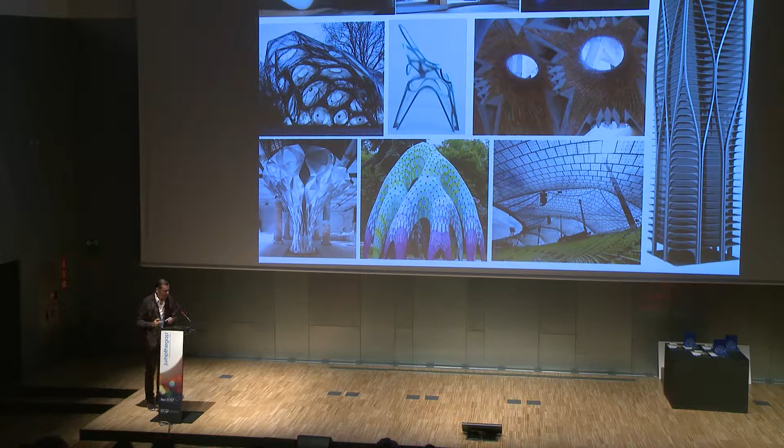So I will spend a few minutes on this. So this is what this new world looks like, and you can see it's very rich, very diverse in terms of textures, morphologies, even colors, materials, detail reticulations, etc. And it has some precursors you can see in the images. Sagrada Familia is one of them, the great Gaudí, who was not inventing form but finding form according to the logics of structure and physics, and Frei Otto as well. And the rest is all contemporary figures. We are within that, but there's quite a few others. I want to name, for instance, Achim Menges and Marc Fornes, among many others.

And so this is how I want to define Tectonism, that it is a stylistic heightening of engineering and fabrication-based form finding and optimization processes. Stylistic heightening because, after all, as designers, we are very much interested in the expression, and design is always also communication, so it is not only an aspect for us of technical optimization, but the morphologies which are coming out of this are very rich and become a beautiful repertoire of articulation.

So, in terms of my theory of styles, I'm distinguishing epochal styles, and the last big transition was from modernism to what I now call parametricism, which has to do with the introduction of computational technologies, but also the changes in society which are driven by the new convergence of computation and telecommunication, which has dynamized society, which required a new style, I would believe. But you can see that here modernism has a series of subsidiary styles. So 60, 70 years of modernism wasn't a monolithic development, but had a series of steps. And I think in parametricism, I started about 25 years ago, we have already seen a number of subsidiary styles, which I will explain.

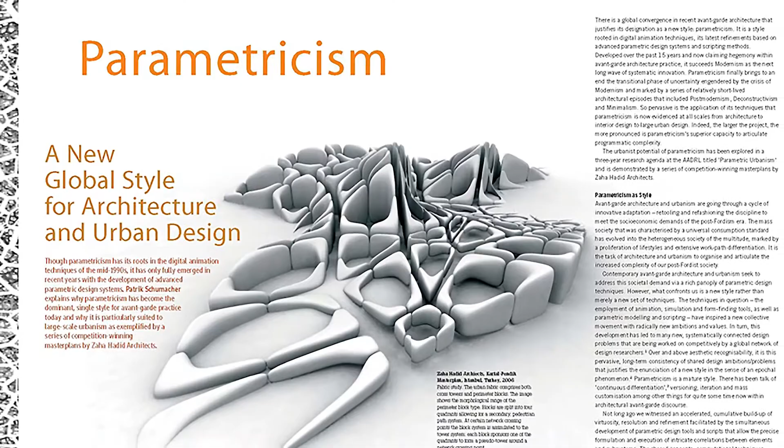So parametricism, I think, emerged in the mid to late 90s, and 10 years later, I was reflecting on the fact that we had a new stable paradigm for over 10 years, and I coined the phrase parametricism. And actually, parametricism also encompasses urban design and a new order of the city, as well as architecture, interiors, and product design. So this is just an overview. That's the work of Zaha Hadid Architects across the various scales, all the way from urbanism through architecture to products. And there's a kind of precursor. Zaha's first sketches from the 80s show already this interest in a new level of complexity and dynamism in her repertoire.

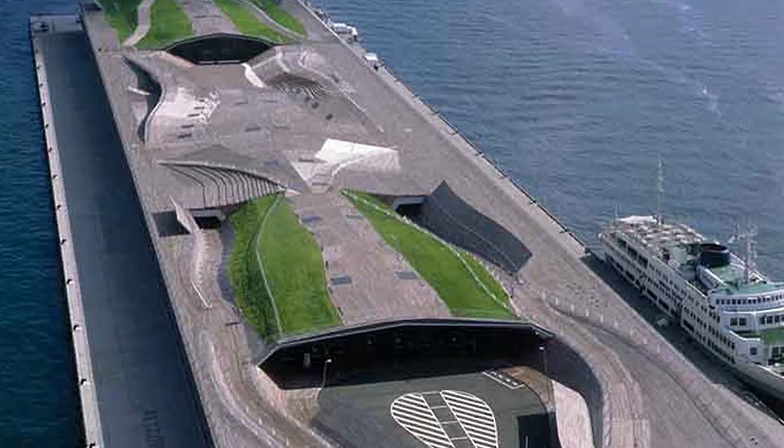And in terms of the first expression, as it were, of parametricism, I term it in retrospect foldism. It starts with the idea that one, instead of building up complexity by adding up pieces or layering pieces like in deconstructivism, one can take a single surface and differentiate this. And it is a very, very adaptive and fluid set of systems which pick up contextual features, internal requirements, and get something going which has both coherence and intensive differentiation. So just a few of those projects which worked with this kind of idea of a differentiated single surface.

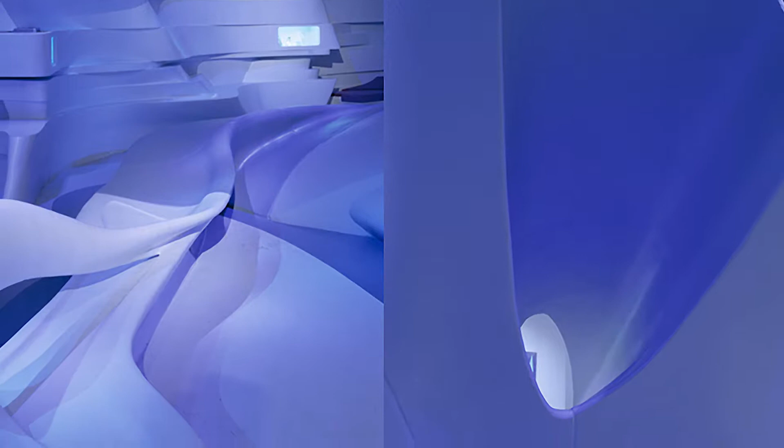It's not only Zaha Hadid Architects, there's FOA. It also moves from buildings to furnishings. Some of our works, student work, this was corporate interiors, urbanism again, and interiors. You can see here that the idea is that you have a continuous variation where situations morph and modulate from one into the other seamlessly. So it is standing against a clear separation of domains and against the cellularization of space into discrete and separate domains. And I'm just going to move you through some of those interiors.

Now, there's also a bathroom from us in part of a hotel room, actually in Madrid. This is a continuous Corian surface material, and a lot happens in the bathroom, so we used this for the whole room. And you can see here that the elements are not plugged onto each other, but one surface is modulated. This is a door where the handle is kind of evolving out of the door surface, or a table which I've designed. But we also find this kind of philosophy in car design. Instead of plugging on a kind of headlight, it's kind of modulated into the surface.

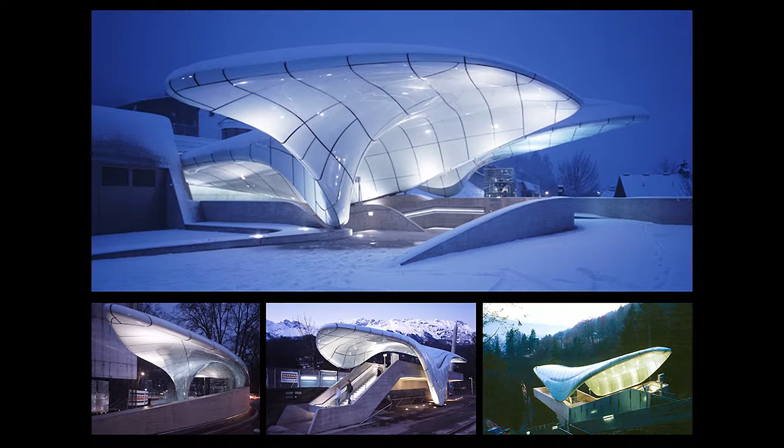And this also goes into product design and fashion design, jewelry design, if you like. So the idea of parametricism and this kind of surfaces is that there could be a system or genotype which can then adapt itself to different conditions and be varied across. And again, in an interior where all the different features and aspects are made out of one continuous surface.

I'll just click through that rather quickly, some of our works on various scales. And, you know, a staircase is just another rippling of a surface which becomes wall, ceiling, the lighting part of the same formalism. And if you do this, you declutter the space. You have a lot of richness, diversity, but the essential features of the space are easy to grasp because they're not cluttered up by adding lots of pieces together.

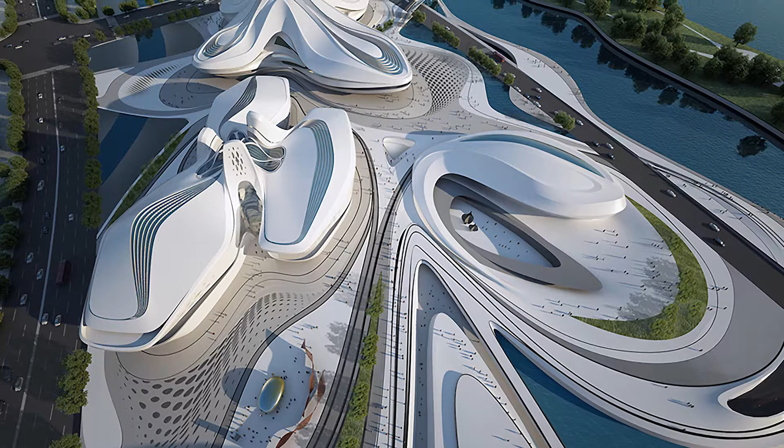And you can also switch atmosphere, and the same principles move from gypsum into timber. And again, the surface delivers the various features and aspects which need to be distinguished and delivered. More recent attempt, where three different institutions of a cultural complex, a museum, an opera house, and a multipurpose house. It's all about embedding this into a landscape and becoming, again, a continuous surface condition.

This is just about to finish on site right now. So as you can see, foldism continues, even though we are in a different stage. These projects take many years to evolve. So what is happening now and finishing on site is not necessarily the latest in our design thinking.

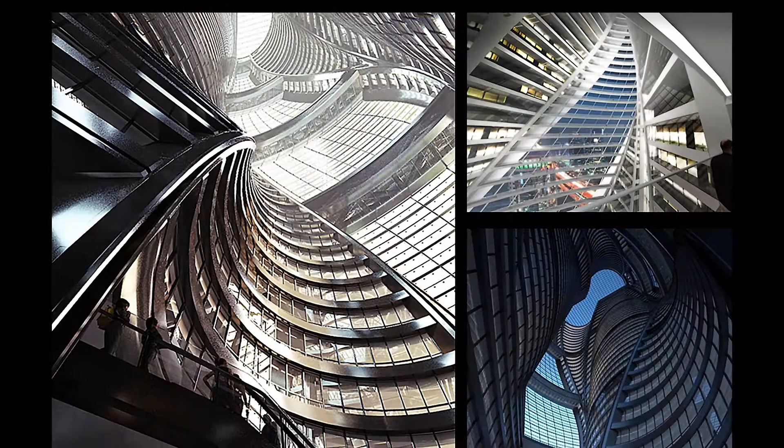Again, this also goes for interior spaces. The continuity of space, we're also applying this to towers now. Instead of separating floor by floor and then cellularizing everything, it's all about a continuous experience you can navigate. So I'm very interested in towers which are opened up through interior atriums.

So the next stage, very similar in a way, is this idea of blobism, on blobs, volumes which fuse, and again, it's nearly another version of that first stage, where you move smoothly from one zone to another, and they're kind of partially articulated. And again, there's a whole world of elements which comes out of that.

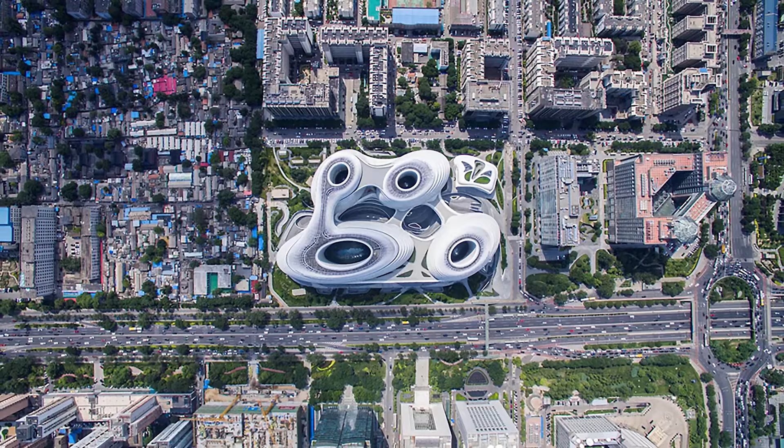And you see, it's quite striking set against all prior architecture. It sticks out, but it also delivers a new level of complexity, three-dimensionality. I describe it as maintaining legibility in the face of complexity. The fused three-dimensionality of this is remarkable.

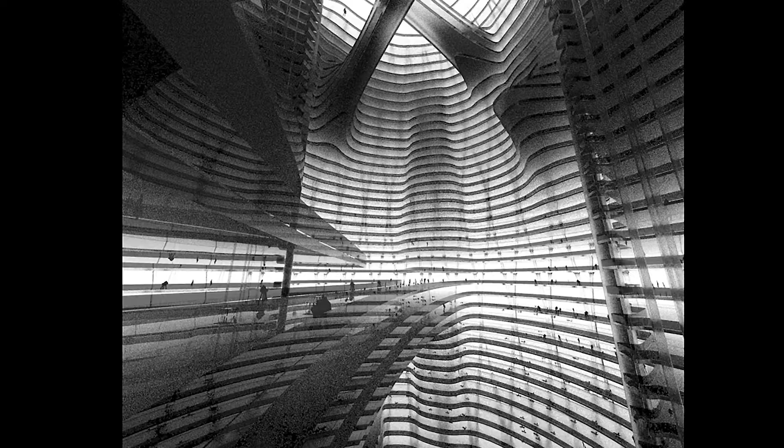So, and again, this is my new passion for mega atriums. So the interior, a continuously differentiated interior world where everything is inter-aware, intervisible, and variation instead of separation is the game. And this is a project which actually we're working on now, trying to bring on site.

Swarmism is something very similar also, but it applies to urbanism and the idea of having discrete elements, but so many that they're no longer parts, but particles which associate in different ways and can differentiate an urban scene. So you don't need to have literally contiguity, you can have swarms of elements which deliver variation and differentiation. And again, I'm interested that this operates on an urban scale as well as on an interior and product scale even.

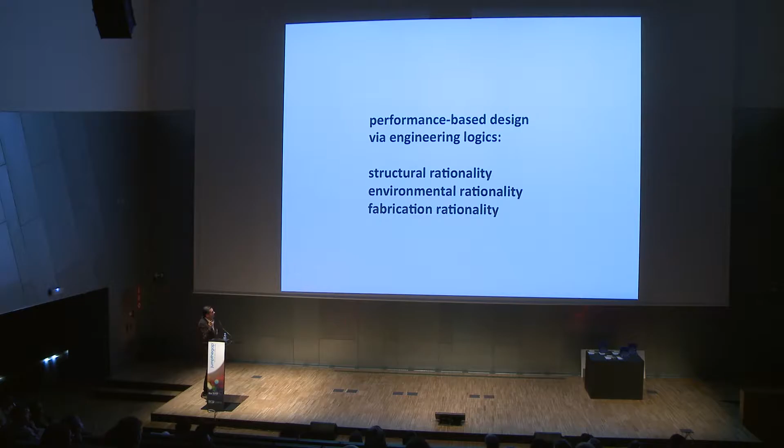So we're starting with performance-based design via engineering logics, and we're looking at structural, environmental, and fabrication rationalities. And then these are heightened into stylistic repertoires, and they characterize the space, giving a strong identity expression to particular space. And this has been throughout history.

And so we've learned from this, we picked that up to give more grain structure, but then run with this in terms of variation, not the repetition of a particular bay, but also letting the exterior participate in this and moving from compression only to tension as well, variation. And these are studies I did with students in AA.

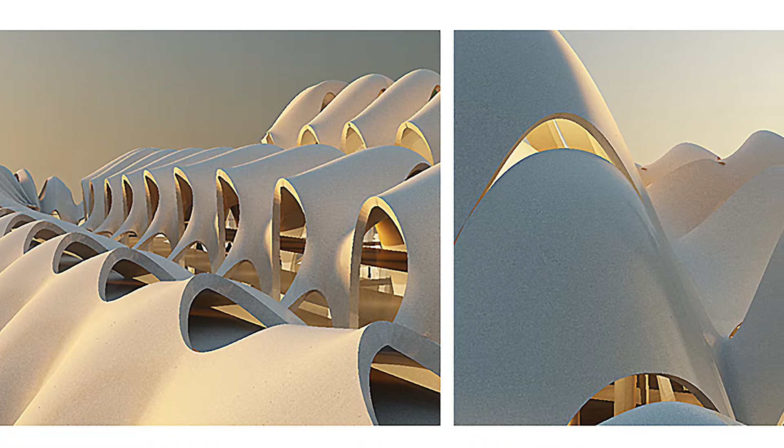And then we moved on to what we're doing in the office, various shell formations. And you can see here that variation is the game. And again, going back to Gaudi, and learning from working with materials to find these forms, to find these morphologies, with working with models, and then translating that gradually into the digital medium to have more versatility.

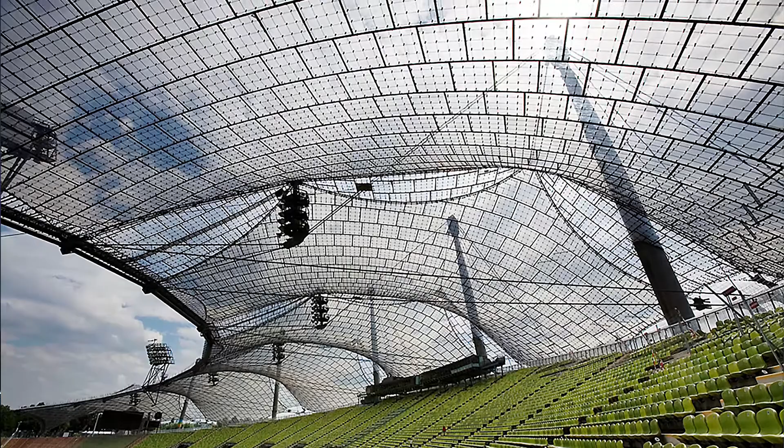So this is models from the Architectural Association, the Design Research Lab. And that's part of a design research to develop these range of forms. What comes to light here is the diversity of forms, textures, materialities, which is an enrichment far beyond what any traditional architecture had at its disposal. Also far more than what modernism had at its disposal, and far more than what parametricism had at its disposal. But there are these precursors like Frei Otto.

And you can see that there's a very particular identity which all tensile structures share. So you can make an enormous amount of variation, but they then maintain an identity across all these variations, which makes it recognizable what belongs together. So that's what I'm interested in. It's non-arbitrary rigor to a design variation.

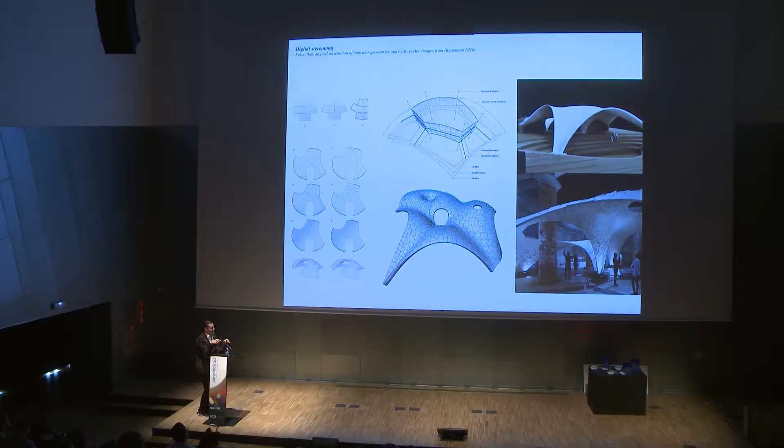And if you look at stone shells, again, we have a researcher like Philippe Block we're working with, and he can unleash them from the traditional insistence on point and bilateral symmetries to make a very, very free form, make them super thin, and then you can see that the tessellations also are coherent with the overall form, and you get a very, very versatile new repertoire for architects. What is significant here is it's super efficient, but also very beautiful and recognizable. It gives identity, something which we need in the built environment.

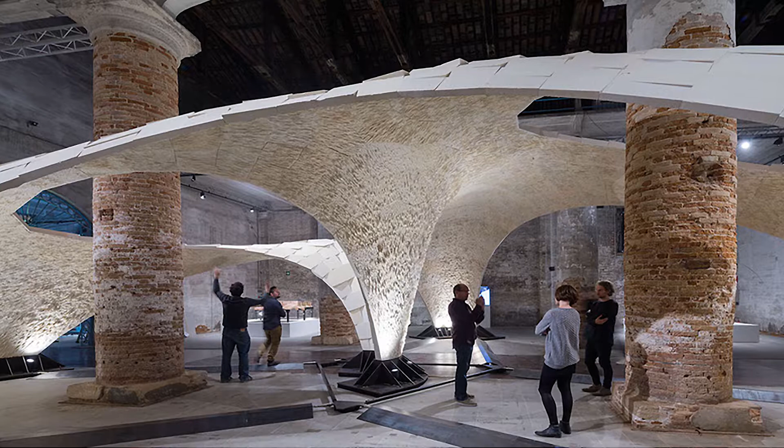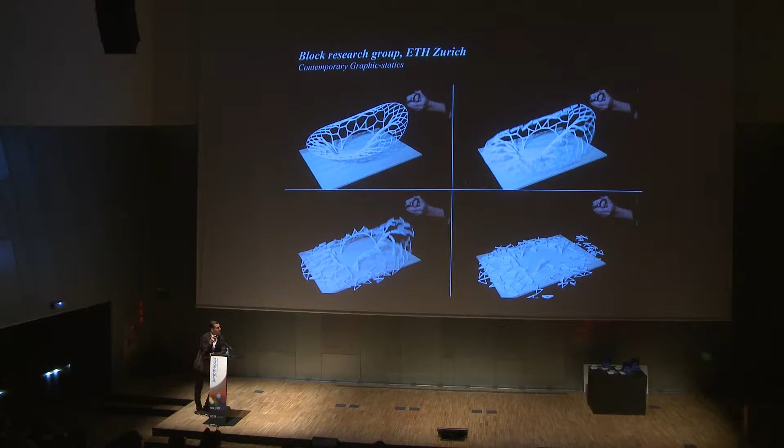And there's also an interest in the different textures which come out. You see the top edge, these kind of facets show off this kind of idea that you just work with what comes out of a construction process and make that the ornament, which is very interesting to me. And again, there are very sophisticated ways of creating these.

So we worked with him and developed these compression-only stone vaults, and learning again from history, because you find a lot of intelligence there, even though there wasn't a science behind this, recuperate this and make it a new engineering-based stylistic venture for us.

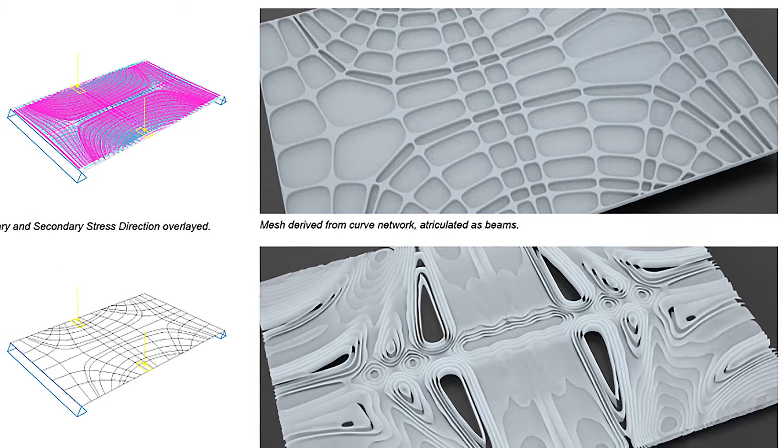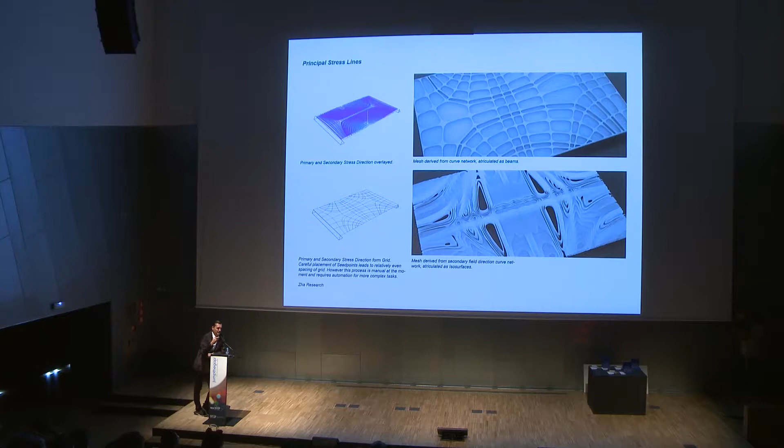And to work directly with engineering software, for instance, to analyze the stress distribution, optimize and generate ribbing patterns, which we then recognize as an ornamental layer, give character and identity, but they also will tell you where's the column, where's an opening, so they guide and orient the user through a space, rather than having a generic grid, which is kind of untelling. So I talk about information-rich environments. So high-performance environments become information-rich environments.

So we worked with this and took kind of a Candela shell and translated this into an optimized grid shell with these kind of differentiated stress lines, and you get something very striking and strong, which again emphasizes where openings and support points are. Tensile structures, of course, are always very typical forms, so we like them. They give identity and character.

And the thing is that the constraint, we give over some of the form and shape making to an optimization process. But since there are so many we could choose from and we can set the boundary conditions, we still feel we have many degrees of freedom to be creative and empowered with our creativity with these. So this is something I want to show on a smaller scale.

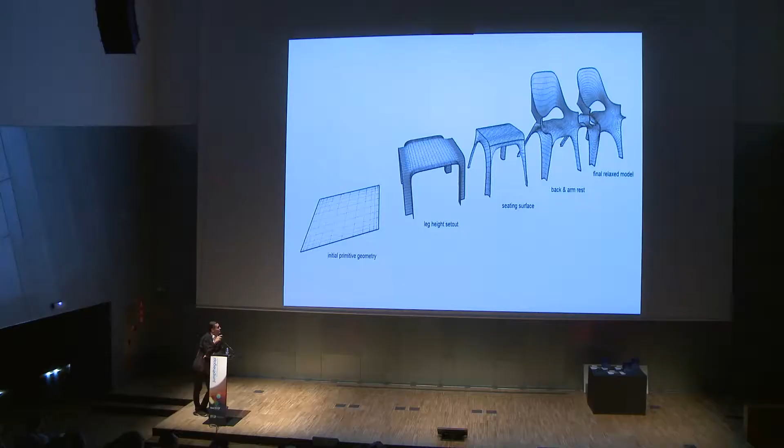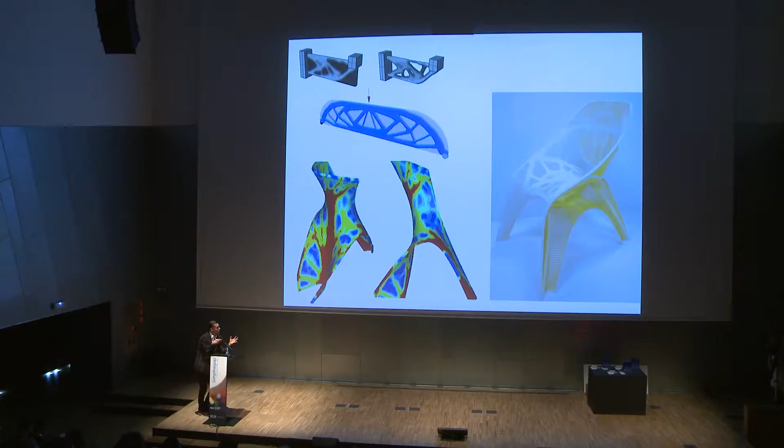The way we develop, we take the chair, the basic outline. The first thing is optimizing the shell form itself through a relaxation process. Then to adopt a kind of so-called topology optimization, so a structural analysis finds out where the surface is working the hardest and increases the thickness and takes it away where it is working least. So in the end, you get a much more optimized, super light element, which is still strong enough. So this is the process of finding the reticulations.

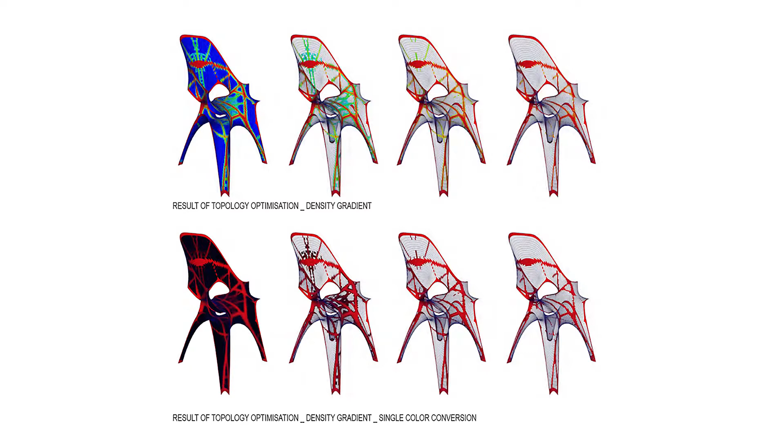And then as a process of deciding, it is again a choice how to translate these results into thickening as well as perforating. And then you get something which is very organic, very beautiful, but super high performance. And then you can choose color to further express this. So there it becomes heightened into some kind of character, signature, form, and ornamentation, if you like.

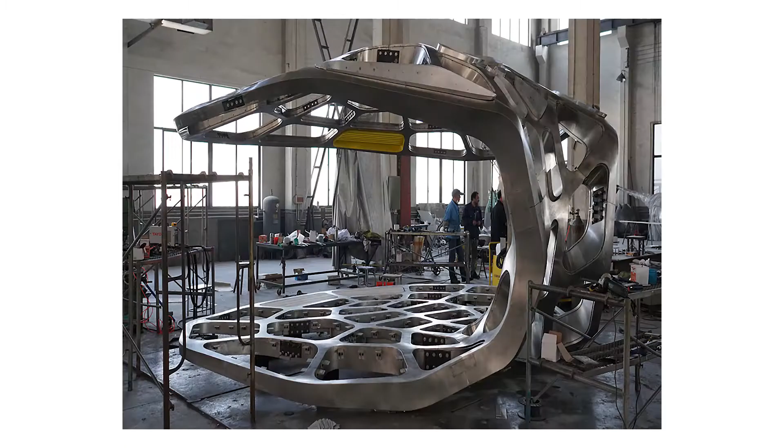And a similar process we used for the pavilion, etc., etc. And we're looking also at new fabrication technologies. They imprint their limitations, and they're super efficient, but they have their own kind of constraints, and then we work with them, and we love that there's a new kind of expressiveness coming out of that.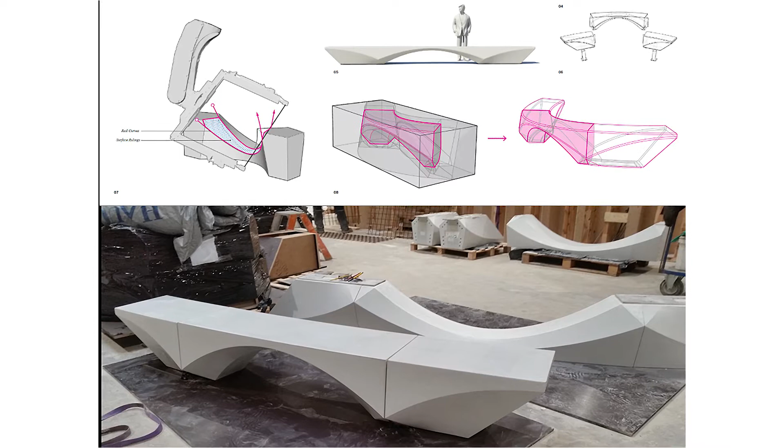There's another version of robotic printing onto a mold which we created, and you can vary the strength and the porosity of such a shell. Or using hot wire cutting to make molds, which is 20 times faster than milling, but it imposes constraints. These are only ruled surfaces, but then all these elements which are created like this share a typical morphology, so they become recognizable subsystems.

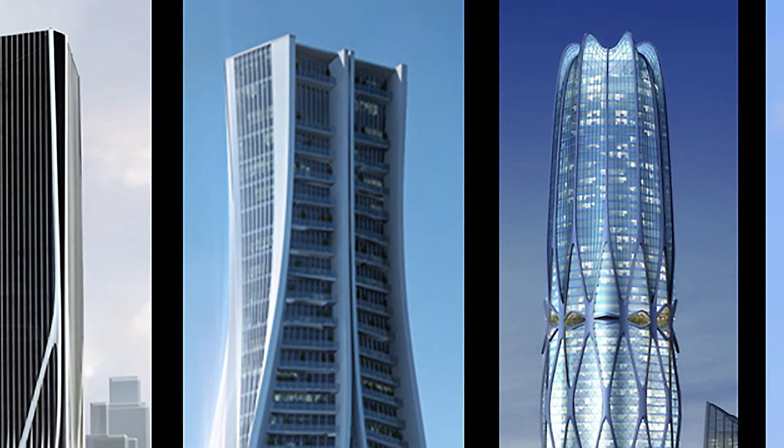When it comes to towers, we also want to differentiate, not just have the same bottom, middle and top, and use the structure to give variation across the tower and character to the tower. And you can see here that all these towers are very different versions of one idea, which makes them also a beautiful ensemble that could come together, because they all show how the structure is more triangulated at the bottom and stronger and becomes more calm and lighter to the top.

So you can have unity across difference, both within the tower and across towers, which are developed from a similar methodology. And I think that gives unity and identity to an environment which is at the same time quite varied and rich. And this could at times become rather complex. Again, this kind of idea of a hollowed-out continuous variation tower. But here you would then see where the structure becomes thicker, you're at the bottom, where it becomes lighter, you're at the top, etc.

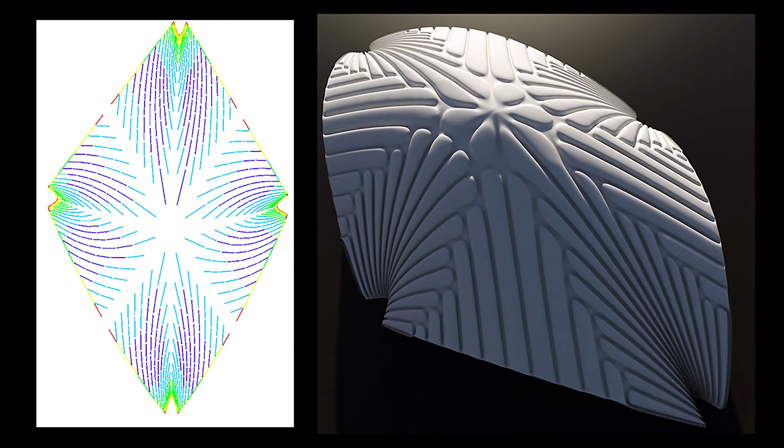Maybe one of the last ones I want to show is something which becomes a palace. So it compares back with Gothic churches or Baroque palaces, and uses only high-performance morphologies like these shell forms, which are not spherical but paraboloid, and using various algorithms to optimize the ribs, and then making choices. I can make the ribs like this, like this, like this. So there's again artistic choice. All of them have degrees of optimality.

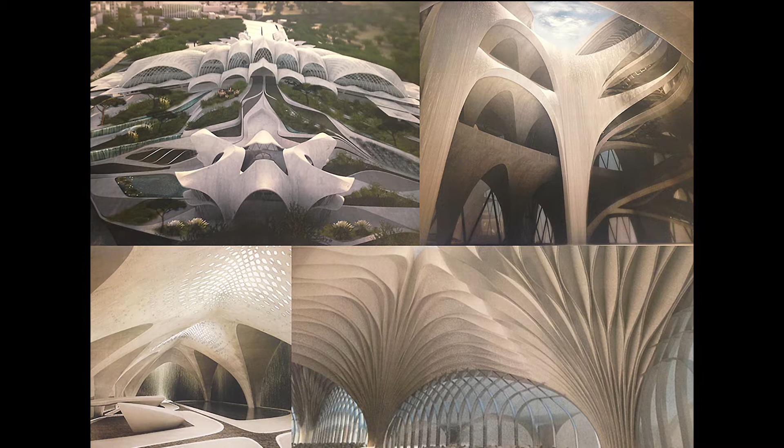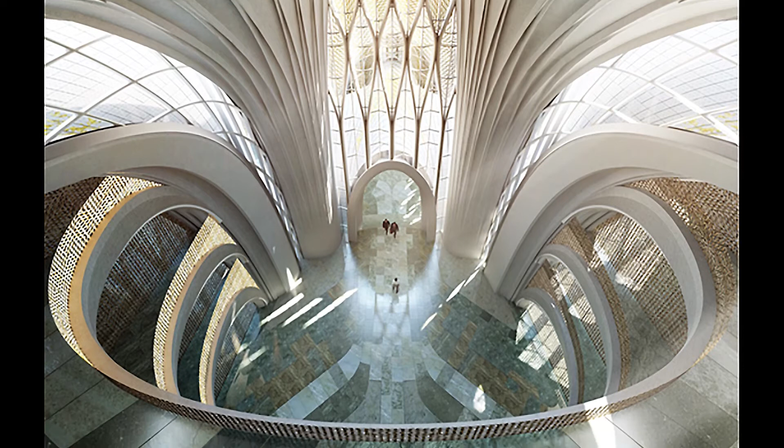You can bring in light, and you can then start differentiating different spaces. And instead of the different Gothic churches, now all in one project, the various atmospheres are differentiated. You know you're in the same building, but very different parts of the building now become differently articulated. And this is the power we have with the tools, working with algorithms, 3D modeling, full simulation. It's the most design-intensive building we've ever made. Instead of 300, 400, 500 years, which this kind of building took in the Gothic era, we can do that in a few years now.

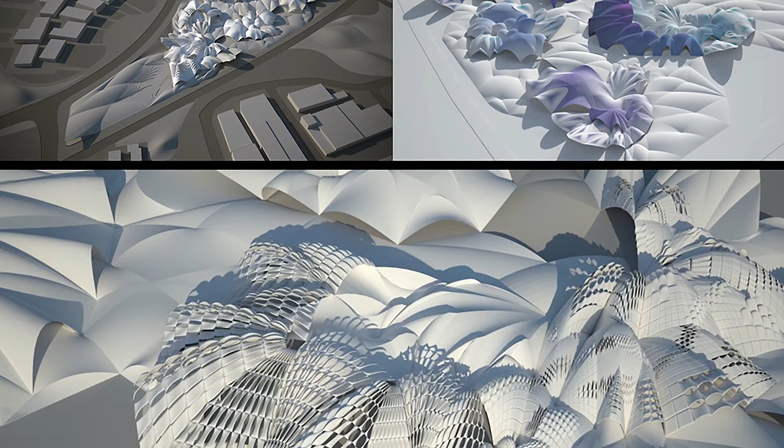And again, working with students. So what we're doing in the office comes on top of a research process which took us quite a few years to develop and to optimize. And you can see here Google Campus proposals from when I was teaching at Harvard, different shell formations. So we're trying to differentiate the campus so it's not all the same within each system. But for such a large project, you nearly feel that all these different versions should be part of one project, so you get more variety.

All of this is Tectonism, but in the end, I think they should all be more varied, and all of these should become part of one project. I'll stop here and wrap it up; I'm nearly at the end. You can see what the beauty and power of this way of working is. First, it is super light, super efficient, super light-footed environmentally and materially.

But at the same time, it gives us a wide range for articulating the new level of complexity and intricacy of the various spaces which come together in the big city, so that you can navigate and find each other. And we can overcome, I believe, in this way of working, what we're finding now, that the various expressions of the city and of buildings are just chaotic in their juxtapositions, and we lack a stylistic convergence, because we're afraid of monotony.

But here is a style and methodology, I think, onto which a whole discipline could converge, because there's so much internal variety and richness, nearly like the endless forms of nature, where we could have a sense of unity, navigability, and order, as well as the variety and differentiation we need. So it's a kind of complex, variegated order, juxtaposed to the unacceptable simplicity of the modernist city, which we have grown beyond, but also to what I believe is a menacing visual chaos we now encounter in cities around the world.